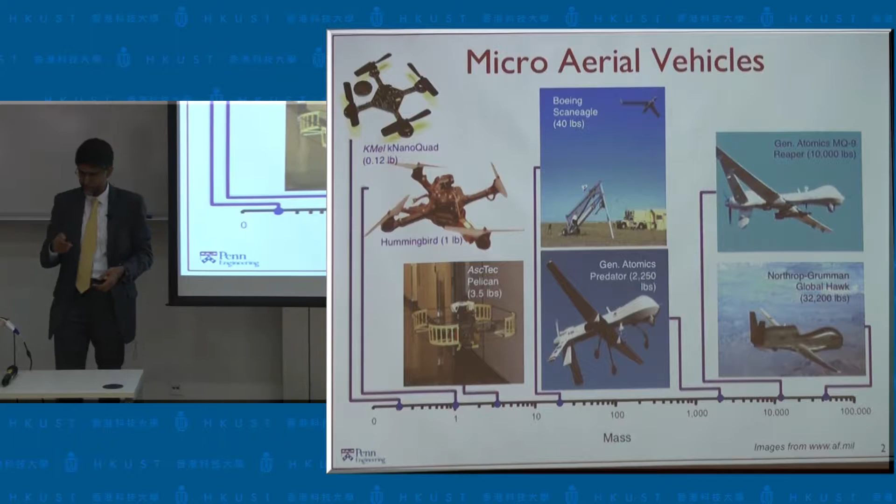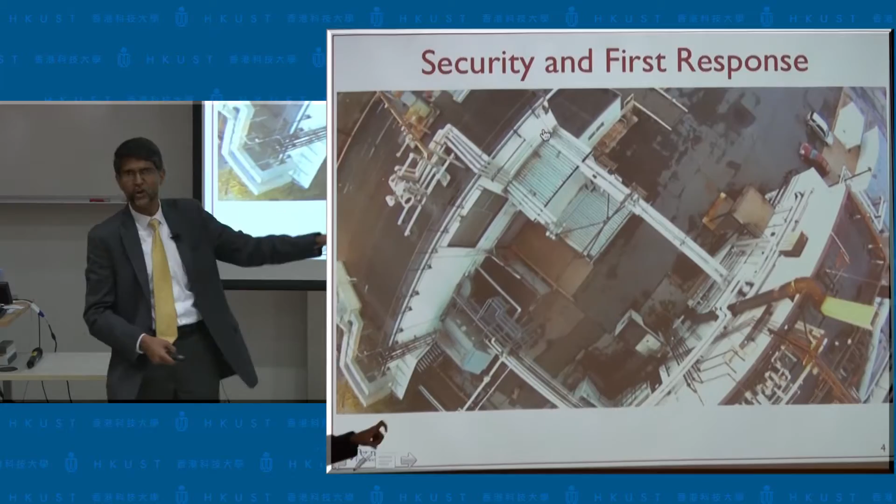We also want to use them for applications in security and first response. Here you see a simple application of one of our robots flying about 80 feet off the ground, able to track objects on the ground. Something like this you can program to be autonomous and perform surveillance, looking out for suspicious objects, tracking cars or moving vehicles, and so on.

Ideally, we'd also like to be able to do things like this. This is not sped up—this is just a robot flying through buildings. There's some manual interaction here, and some of this is autonomous. But what we'd like to do is have them go through buildings, go in and find out what's there, and tell us if there's something unexpected, so that if human first responders need to go in, robots can provide an integrated view of what's inside the building before they actually go in.

So I'll be telling you a little bit about how we enable autonomous flight for operations like this, for example, flying through hallways.

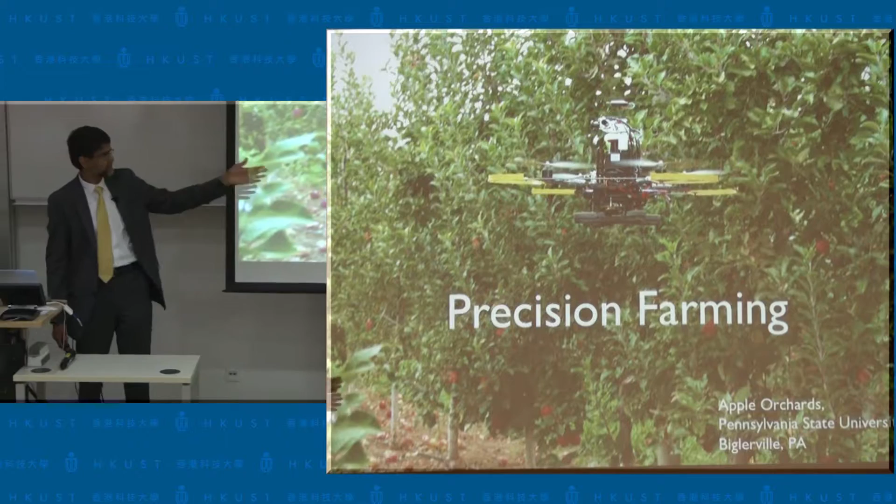And then lastly, we're interested in applications in farming. These are experiments we conducted not too long ago at the Penn State campus, which is distinct from University of Pennsylvania, in Biglerville, Pennsylvania. These are apple orchards. What we'd really like to do is fly through the tree lines, fly above the tree lines, map out individual trees, estimate the canopy size, project the growth rate, count the number of apples on trees, and distinguish between them.

No, this is a serious problem, by the way. Think about a manufacturing plant—you ask the plant foreman how many widgets you have of type X or type Y, and there's an answer. You ask a farmer how many fruits they have, and there's no estimate. So we'd like to be able to do this and, plant by plant, document what's growing, how fast it's growing, and also monitor the state of plants.

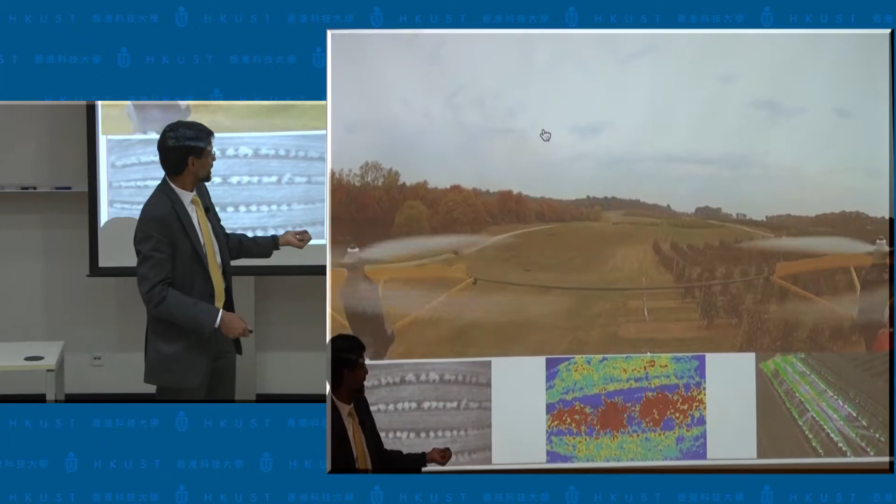Using some very simple techniques, we think we can detect, for example, which plants are suffering from heat stress and which are suffering from water stress. Here are examples of three-dimensional maps that we can create on the fly. In this particular case, we have three robots simultaneously accomplishing this operation.

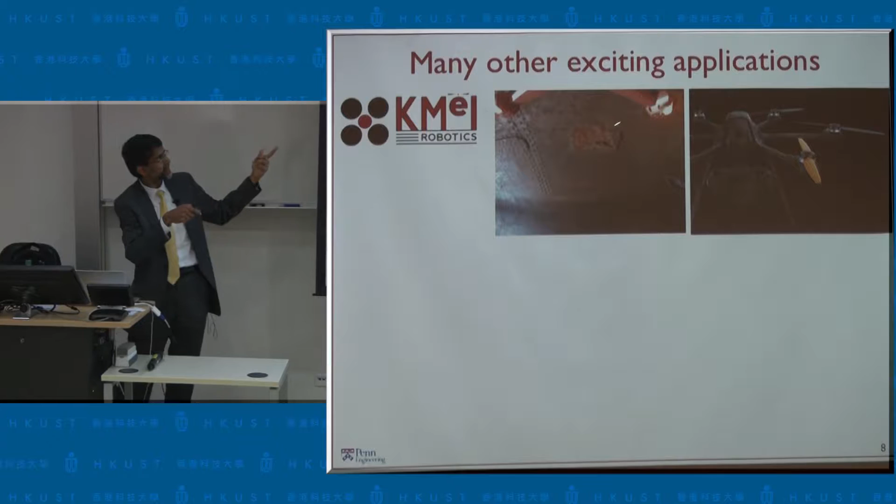And there are many other exciting applications. One of our spin-off companies, KMel Robotics, has partnered with a company in China to create these flying eyes for aerial photography. A more interesting application, however, is a robot for inspecting the inside of hydroelectric power dams.

This is actually the interior of a penstock, which feeds water from a dam through the turbines downstream—going inside and inspecting the interior to detect rust spots like this. So we'd like to be able to do this autonomously.

Another company is looking at developing a swarm of quadrotors with small ground-penetrating radars. The idea is that military convoys typically can only go at 2 to 3 miles an hour because somebody has to go in front and sweep the area for explosives. But if you have ground-penetrating radar in a swarm that's patrolling, you can potentially increase the speed by an order of magnitude. So we'd like to be able to do things like this.

And then finally, a company in California is interested in monitoring construction sites. This is a football stadium—for those who know American football, this is the new 49er stadium in Santa Clara. So we'd like to solve problems like this, which involve monitoring and logistics.

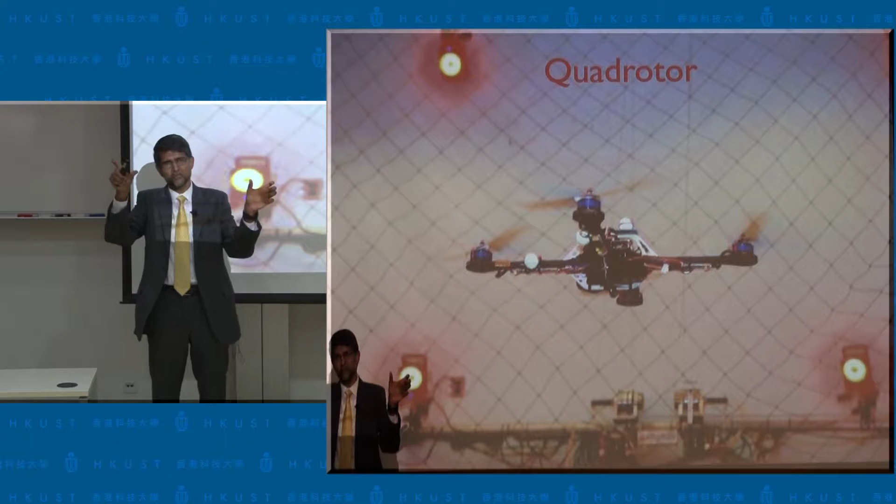And again, the vehicle of choice for us is a quadrotor. If you want to build large teams of robots, you want to pick a design that's mechanically simple. Although there are lots of ways to build microaerial vehicles, today the easiest thing to build is a quadrotor—you have a rigid frame, motor, props. As the rotors turn, you generate large gyroscopic moments, all transmitted through the motor shaft to this rigid frame. There's no flapping of the blades or anything like that—it's just a very robust design.

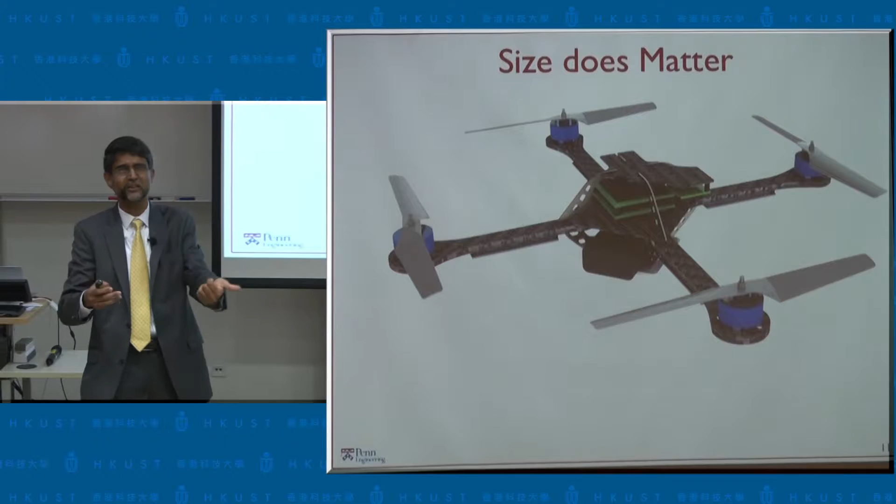As in many things, size does matter, and you can look at scaling effects - basic laws of physics, inertia, aerodynamic forces. If you take the characteristic length R and squeeze it, you'll find things like mass and inertia go down dramatically. Actually, so does thrust.

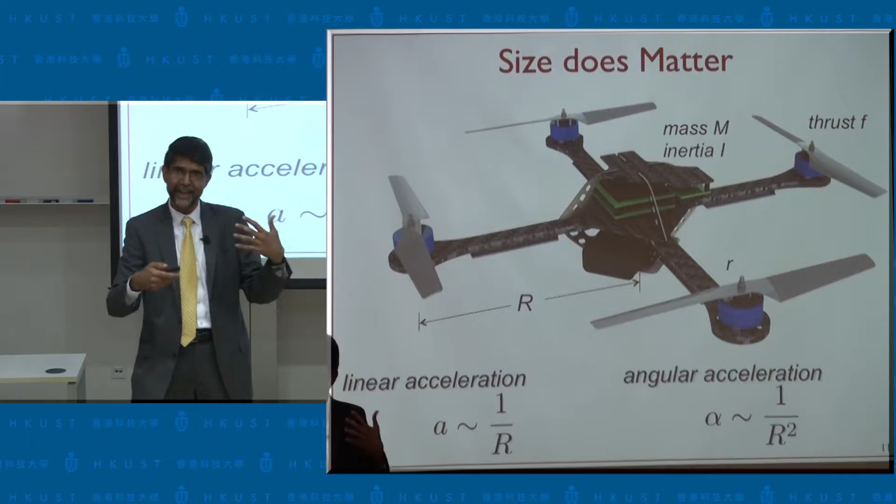But if you look at the scaling of aerodynamic forces and rigid body dynamics, you'll find the maximum acceleration you can develop goes inversely as R. So if you take your typical platform and scale it down by a factor of 2, the acceleration doubles. More importantly, the angular acceleration goes up by a factor of 4.

So we like to use this to create really small robots that can maneuver very quickly. Our smallest robot, shown here, can perform flips in about half a second, meaning it needs to accelerate from 0 degrees per second to a top speed of about 2,000 degrees per second in roughly a quarter second.

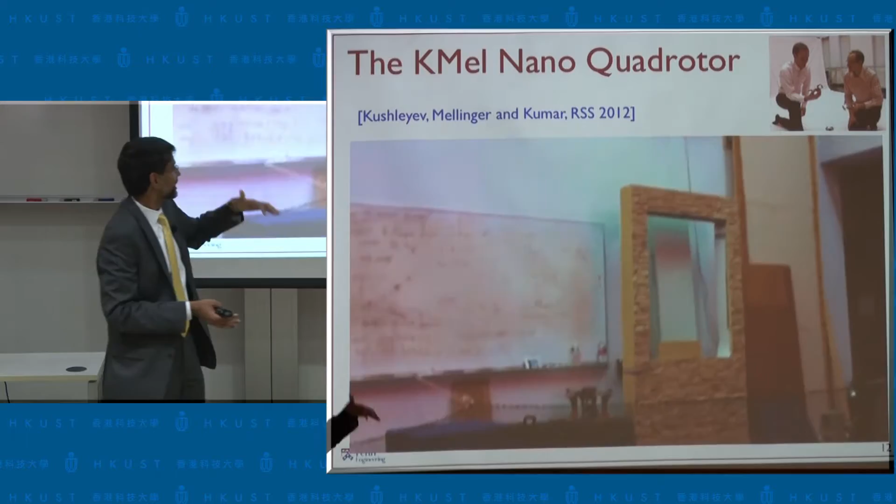We work very hard on building controllers that can stabilize these rotations, and I'll say more about this going forward. By the way, this is the work of Daniel Mellinger and Alex Kushleyev, who are principals of KMel Robotics, the spin-off company I told you about earlier.

So what I'd like to do in the next 40 minutes or so is tell you about some of the research problems we're trying to tackle. First, problems in dynamics, control, and planning of quadrotors, particularly focusing on agility and autonomy.

Second, a fundamental problem that has to do with state estimation. If robots are to be autonomous, they have to figure out where they are in this world without relying on external sensors like the motion capture cameras I showed you earlier, or GPS. You cannot take GPS for granted, particularly indoors.

And then lastly, I'll talk a little bit about how we think about swarms of these cooperating to do different tasks. So those are the three areas I thought I'd hit on. If there are questions, I'll stop briefly at the end of each area and take your questions before moving on.

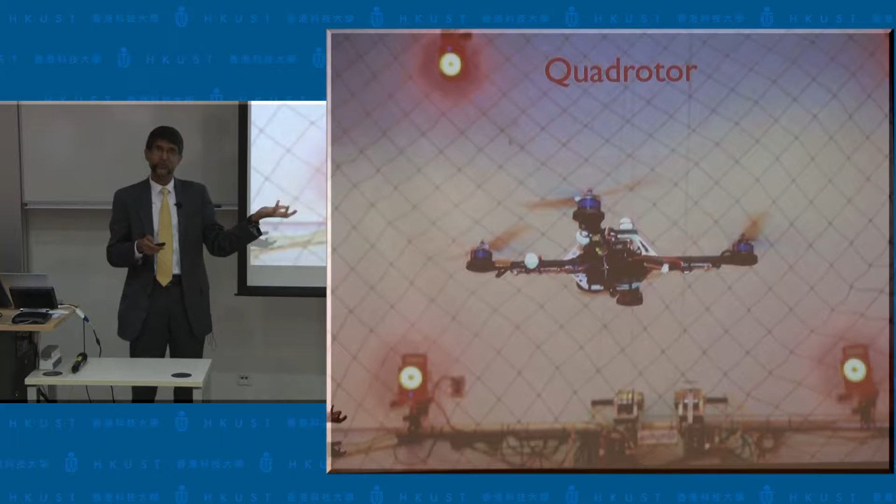Okay, so let's first start by talking about the dynamics. A quadrotor consists of - and I'm going to assume most of you are not familiar with this, so this is a basic introduction to how things work - a quadrotor, as I told you before, is an aerial robot with 4 rotors. The most important thing you need to know is how to control the roll and pitch.

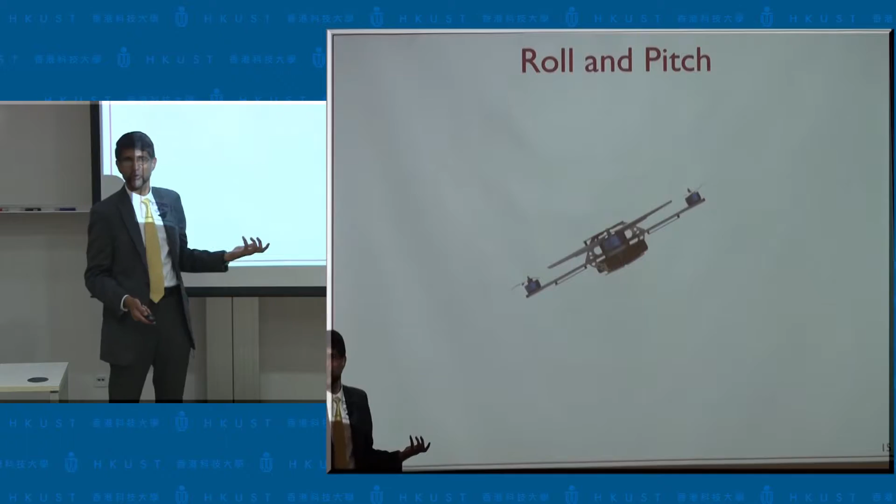At equilibrium, all the rotors spin at equal speeds, and the thrust compensates the weight. If you wanted to roll or pitch, you take one rotor and spin it faster, generating more thrust than the other, resulting in a pitching motion - or you can think of it as rolling out of the plane. If you want to go in the other direction, you just reverse the differences in the rotations. We work quite hard on designing controllers that can stabilize roll and pitch through 360 degrees.

And what you see here is some sense of how robust the controller here is. You see Daniel Mellinger just throwing the robot into the air, and we need to have it stabilize automatically. One of the things you can actually show is that this is a controller that works on the group

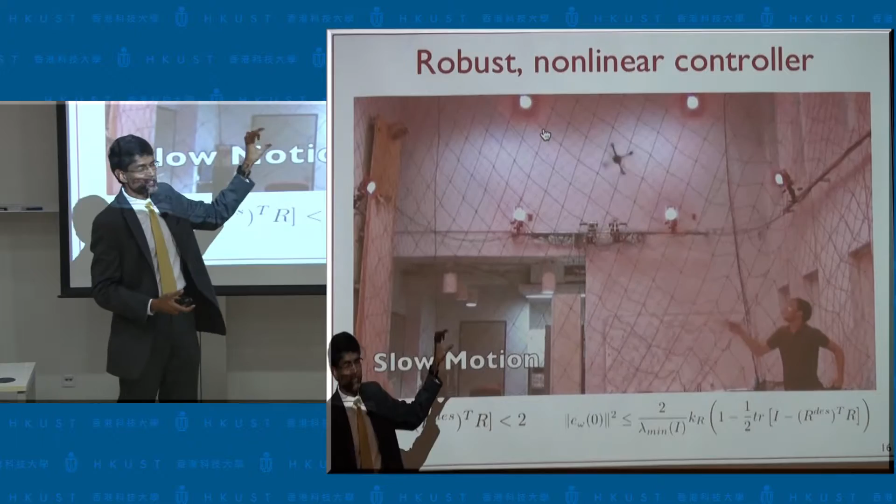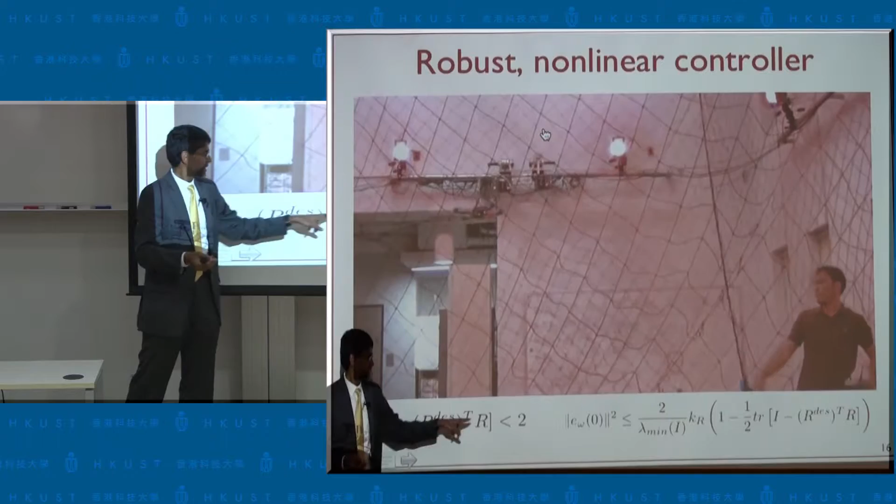of rotations, and it's stable almost everywhere. The basin of attraction is almost everywhere. In fact, if you look at this inequality, this basically tells you that the rotation matrix can be far away from the desired rotation matrix. This is an equality when the rotation is exactly opposite. So in other words, I want to get to this configuration, but I'm starting off in that configuration. So that's the only point where it fails.

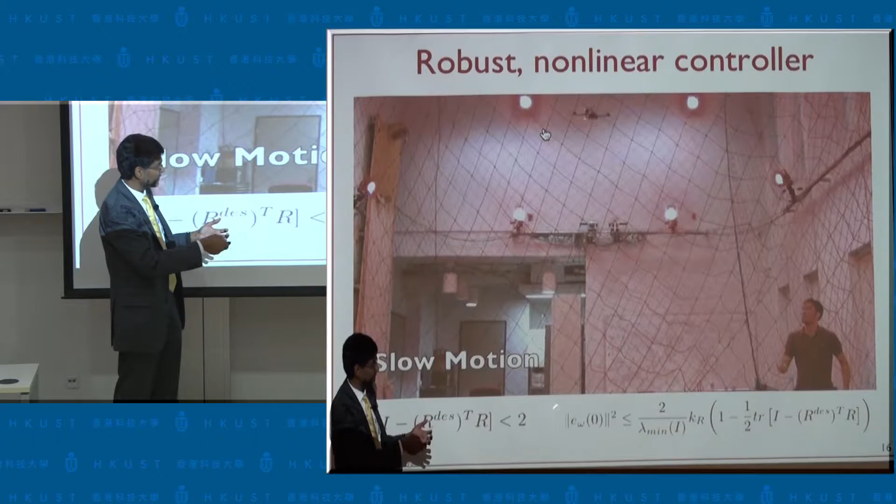This equation basically tells you that if you look at the allowable errors in angular velocity, that's bounded by this right-hand side. And a key thing I want to point out is if you look at the denominator here, this is the smallest eigenvalue of the inertia tensor. So what this is telling you is if I can make the robot really small, this inertia tensor is small, and therefore the denominator is small, and the right-hand side grows bigger. And that tells you that the allowable errors in angular velocity can be larger. So again, this idea that as you make things smaller, your controllers actually become better and better, and you can leverage that as you see in this particular picture.

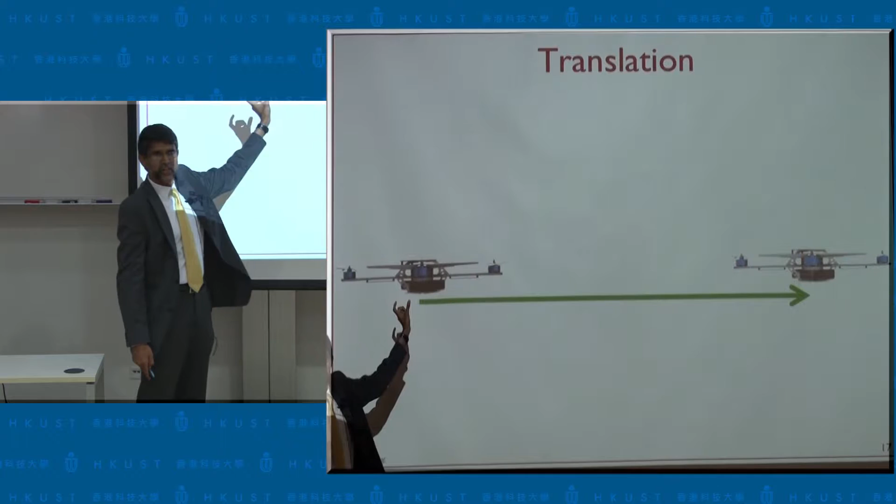Translation, however, is a little more complicated. So if I want to take this robot and have it translate from one position to another position, this is hard to do because, remember, the thrust is actually in the vertical direction. So the only way you can get it to go horizontally is by pitching it forward, redirecting the thrust. And then when you're going at maximum speed, you have to start slowing down as you get to the final position, which means you have to pitch backwards and reverse the thrust. So mechanical simplicity means that you have to spend quite a bit of effort in the control. And then when you get to the end position, you have to pitch it back to the position you want to be in. So all of this needs to happen seamlessly without the user sort of worrying about the controls.

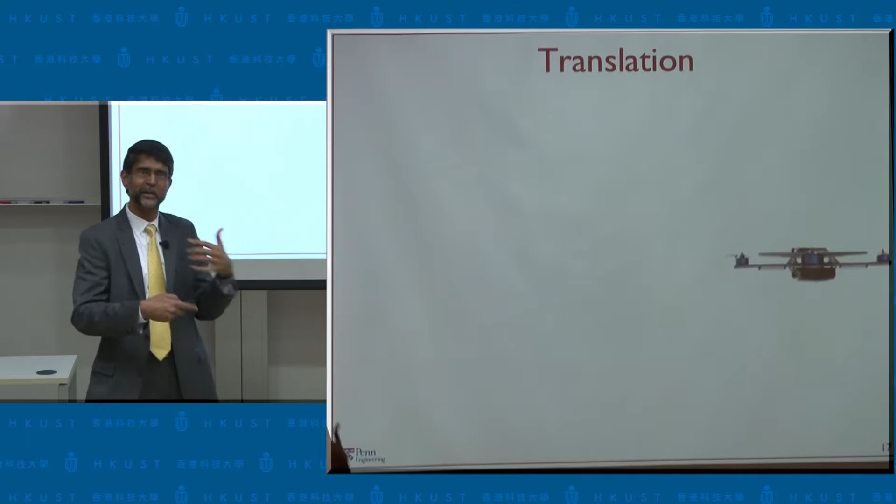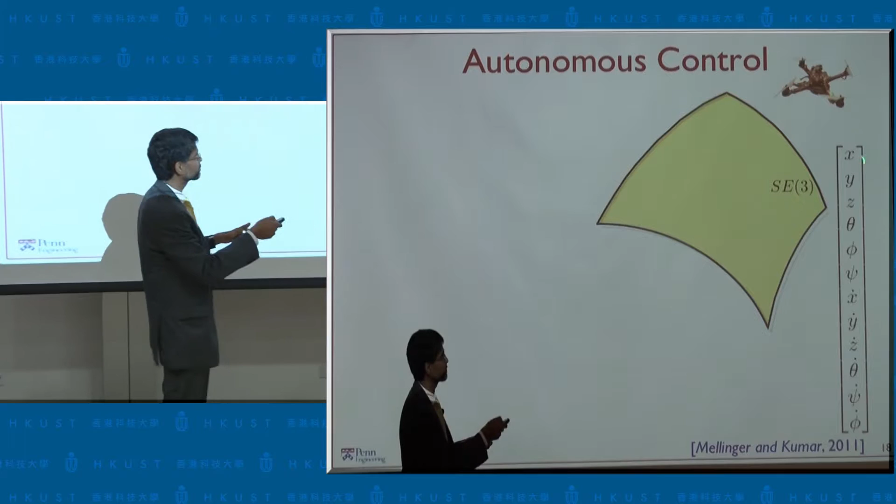And remember that when you put all of these things together, you can't ignore or decouple the position and orientations. They're all coupled. And plus, you also have to consider the velocities. In fact, if you look at the state space, and if you look at the global nature of the state space, it's best described as a tangent bundle in a Lie group type setting, and the Lie group in question is the Euclidean group.

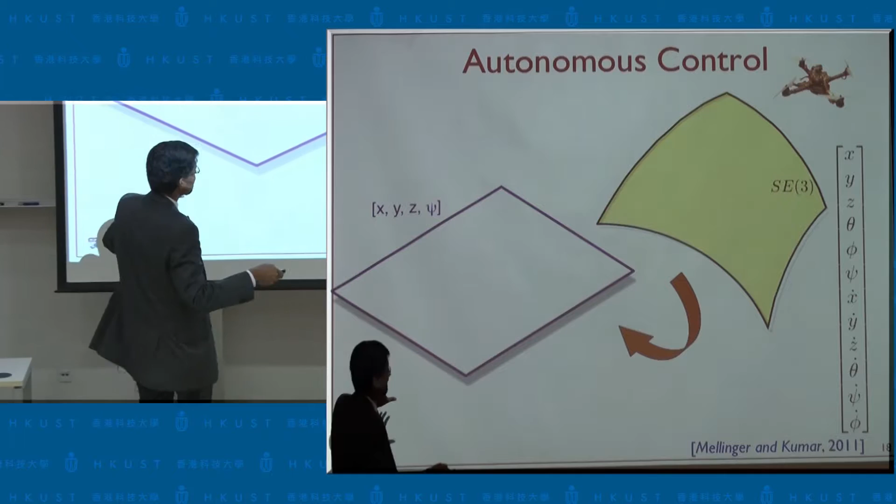So you really have to figure out the dynamics on this group and design controllers and trajectories on that group. So fortunately, there's a differential structure that actually simplifies the treatment of the mathematics of this problem. It turns out that there's a map between this space and a space that's almost flat, such that all realistic trajectories, all trajectories that satisfy the laws of physics, actually map to sufficiently smooth trajectories in this almost flat space. So this almost flat space consists of x, y, and z, which is actually flat. This is the Euclidean space we live in. But there's another angle here, which is the yaw angle.

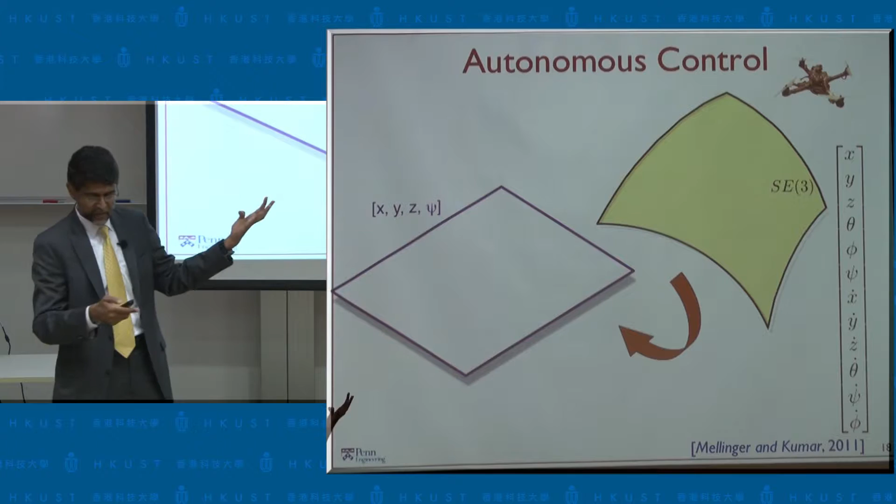So this yaw angle is not truly flat, because the yaw angle has the topology of a circle, so if I were to chop the circle and stretch it out, then it becomes flat. So if you allow me to do that, then the point I'm trying to make here is that any realistic trajectory I can generate here corresponds to a trajectory that lives in this flat space and is sufficiently smooth. In fact, the property I want to insist on is that it's 4 times differentiable. So this property is called differential flatness.

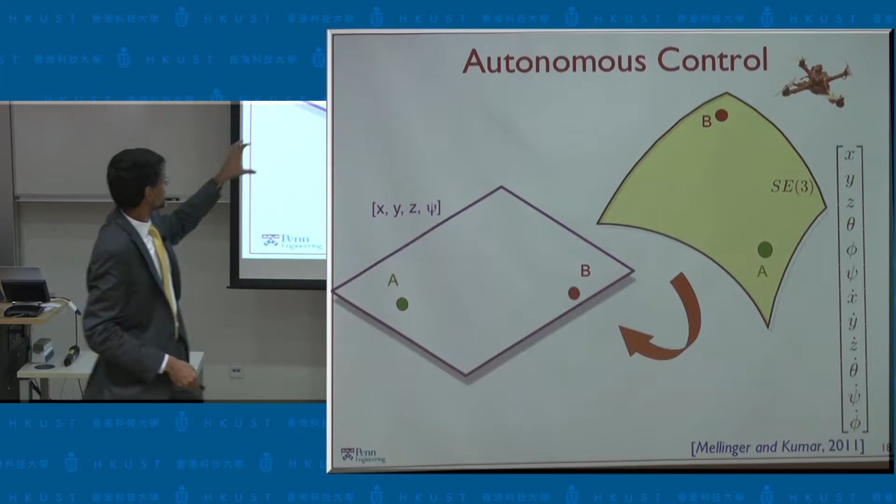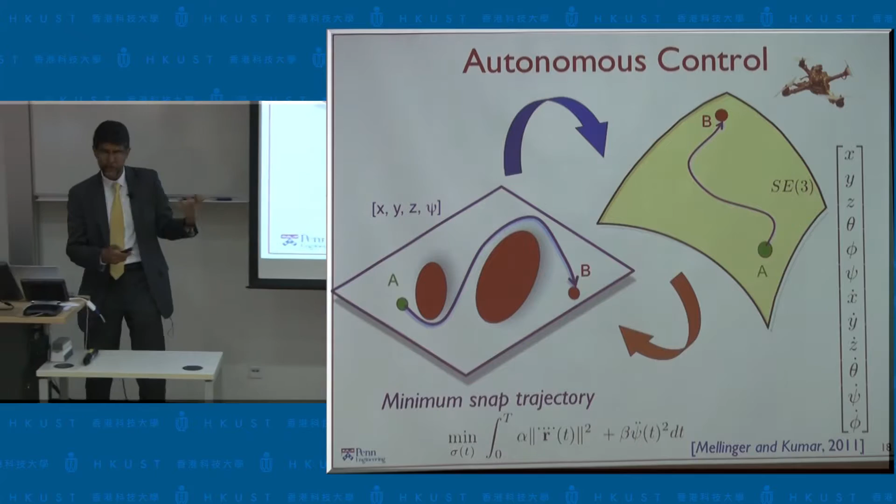So that's the general setup, and I can show you a few videos that illustrate how the robot flies using this trajectory planner. Here's the robot going from point A to point B through an intermediate point C. Although the trajectory it plans is flat, when you convert it into SE3 and the tangent bundle, you'll see large roll and pitch angles that you would not have gotten in the flat space. But the planner is agnostic to all of that. All it's saying is: go from A to B through point C, starting from zero velocity and ending at B with zero velocity.

Everything else happens seamlessly under the hood. This optimization problem we can solve several tens of times a second if necessary to generate trajectories and keep updating them depending on how the environment changes.

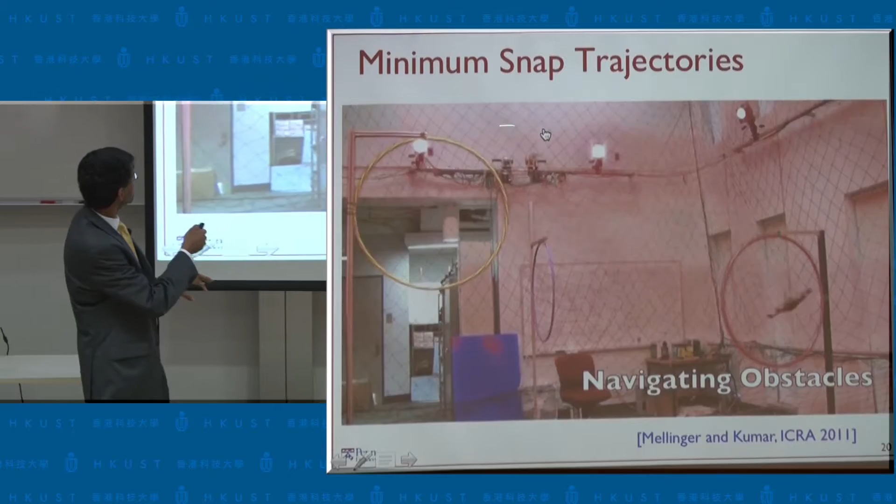This simple strategy we can also use to go around obstacles or through them, as in this case, where you see the robot flying through hoops. Remember, everything in the environment is known precisely — we have motion capture cameras telling the robot where it is and where obstacles are 100 times a second. In fact, when one of these hoops is thrown into the air, the robot knows where it is and how it's falling, extrapolating from the laws of physics to predict its trajectory and plan through it.

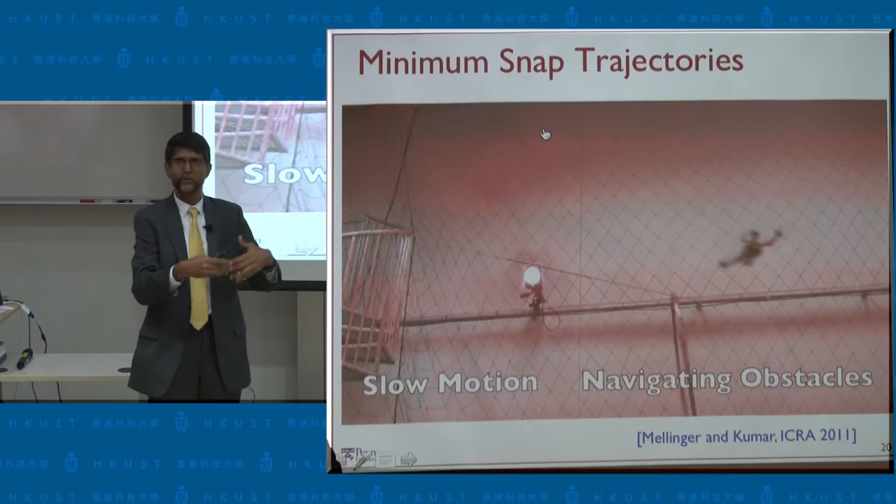We have an orientation controller that tracks the required orientation you plan, and then an outer loop, a position controller, which essentially does the rest. All of this happens on board the robot. The planner itself resides off board, on a bigger computer, and communicates wirelessly to the onboard controller that sits on top of the robot.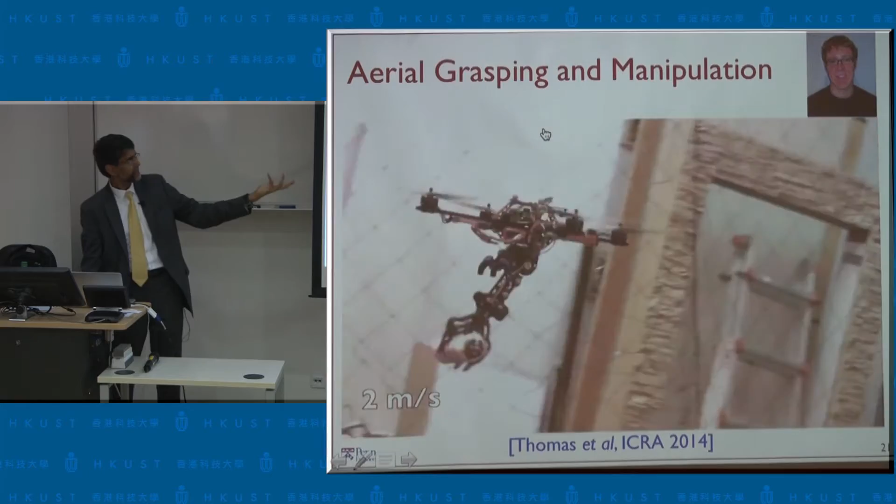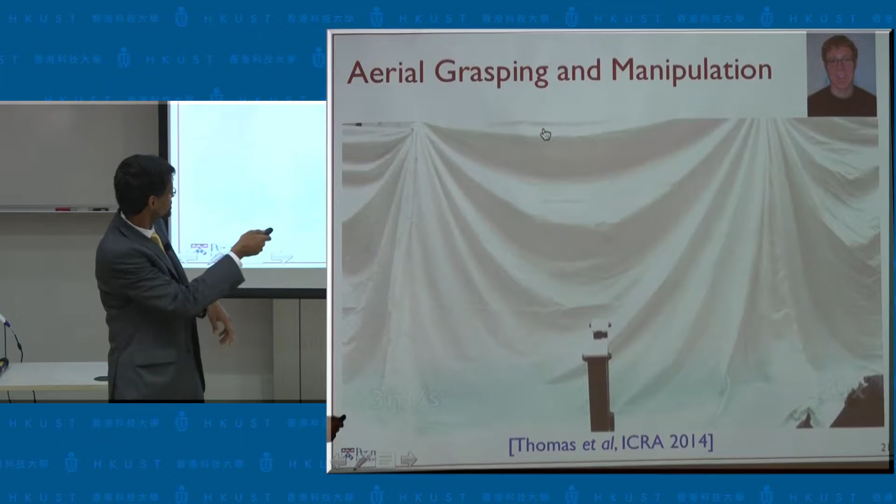It turns out that this particular dynamical system also has the property of differential flatness, and the same theory as before allows us to do exactly what you see in this video. This is work by Justin Thomas, who in three months will be presenting it here in Hong Kong at the ICRA conference.

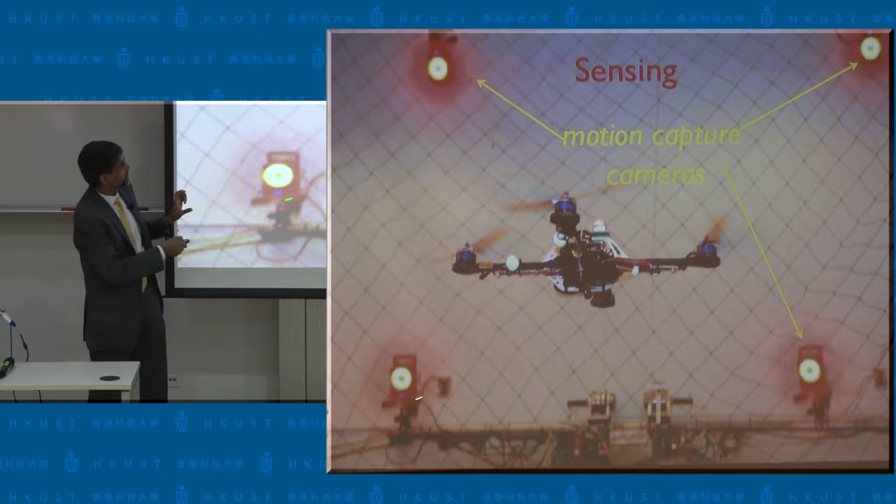However, everything I've told you about really relies on these motion capture cameras. You can see them on top, and the robot is equipped with reflective markers. This is what allows the system to know exactly where the robot is at 100 times a second, with errors on the order of millimeters.

The reality is, we don't have that system available everywhere. Unlike bigger aircraft, we don't even have access to GPS, and even if we did, in the shadows of buildings you won't get GPS. Indoors, where the kinds of missions we want to do operate, there's no GPS, and maneuvering becomes a problem, especially at high speeds. So what I want to talk about next is how we address this problem of estimating state in indoor environments, and how that leads us to autonomy.

But let me pause here and see if you have any questions on the first part before I move forward. Yeah.

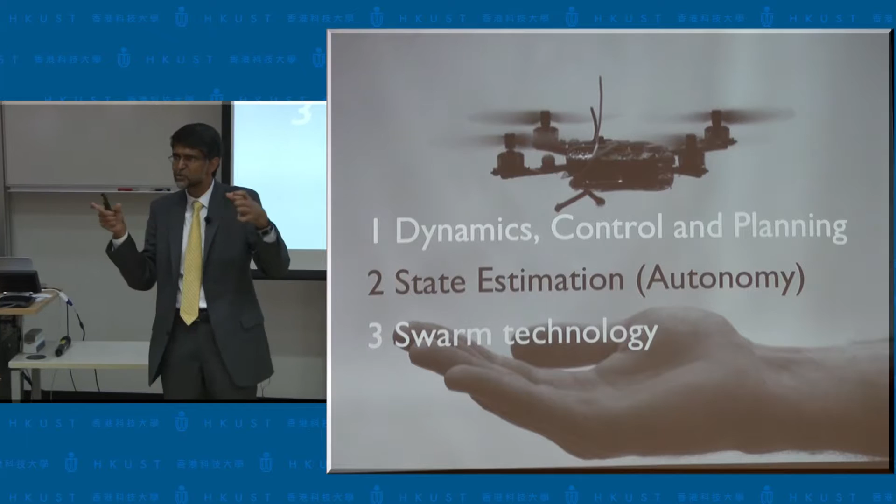So you need four rotors in order to stabilize all the motions — you can show that fewer than four results in undesirable properties. You can certainly do five, six, and so on; in fact, adding more gives you more robustness, and you can make the blade sizes smaller, which is attractive since those blades can be pretty vicious — I actually have my finger taped up from one. So there are benefits to more rotors, but compared to the disadvantages — more motor drivers, more motors — it's just not worth the trouble.

Any other questions? Yeah. You design the trajectory from A to B, you might have a lot of multiple choice.

We're always looking to optimize, so this problem turns out to be convex. If you take this quadratic functional, which depends on the higher order derivatives of position and the yaw angle, that turns out to be convex, and you can solve for it and get a unique solution. But if you have a non-convex problem, I'll talk a little about that.

If you have obstacles and you want to stay outside the obstacles, that is inherently a non-convex problem. But we have ways of convexifying all of that, and the main thing is we cannot afford to have algorithms that hang in the middle of the optimization. So we try to get predictable performance, and that's one of the key things.

Are you really looking for a feasible solution, or are you looking for optimal? If you want to go quickly, you want the optimal trajectory. This trajectory has time scaling properties that allow you to scale down and meet whatever other constraints you have.

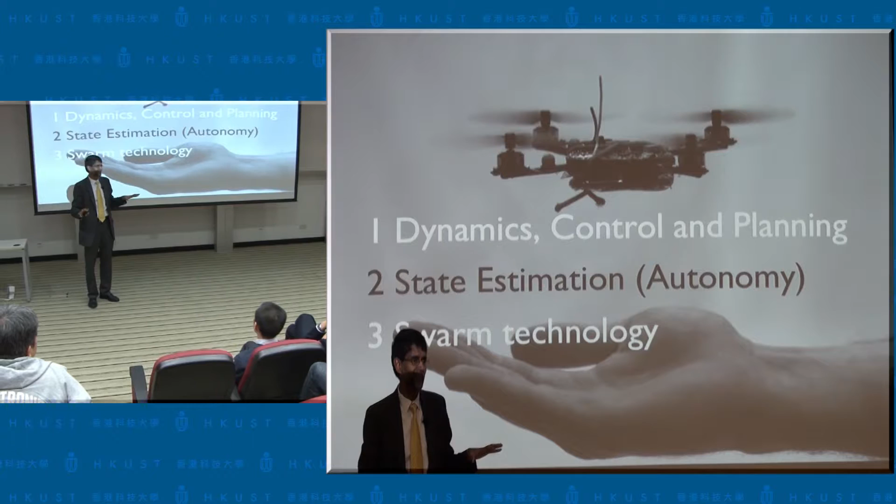Oh, there are a lot of variants in this design. Like I said, I'm a mechanical engineer, so this is the simplest design you can kind of come up with, and it's the one that has served us the best. We've built all kinds of devices, and this has sort of stood the test of time, if you will. Works nice.

Well, so I mentioned the effect of scale on the properties of the algorithm. Clearly, when you try to design the controller, you want to take advantage of scale - the smaller it is, the more aggressive you can make it. To that extent, yes. So there's a model-based part, which obviously depends on the model, and then there's a part that's invariant to the specifics of the model.

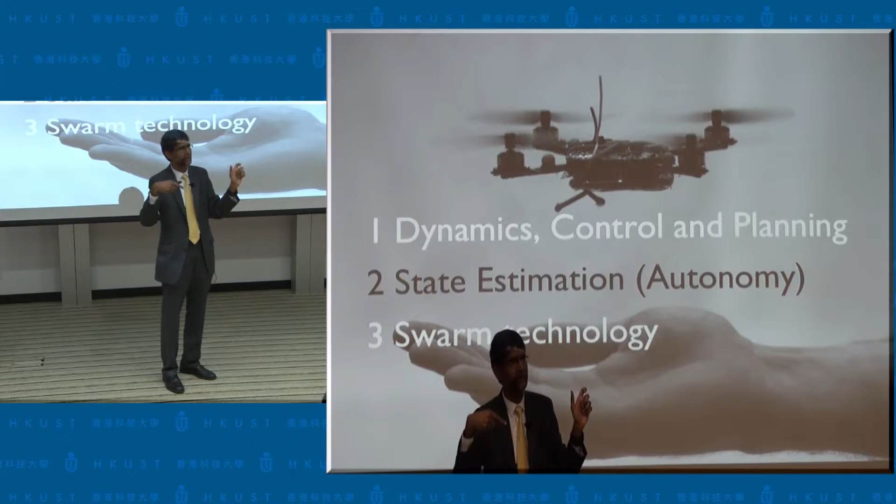I should also say there's a third part which essentially adapts to things it doesn't know about. Like, going through the hoops I showed you, we can actually make the hoops tighter - we can have vertical slots just about the same width as the height of the robot, and have the robot go sideways. But if you do things like that, you have to really adapt to the aerodynamics, so you need some iterative learning scheme that finds out what the right parameters are. That part I didn't talk about. But there are these three parts to it, and all of those depend in one way on the specific type of robot you're using. But the design methodology is the same.

Okay, so let me move ahead.

Talking about unstructured environments again - remember, no GPS, no motion cameras. This was our first attempt to build a robot like this, about 3 years ago. Again, off-the-shelf sensors. The main sensor here is this laser scanner made by a Japanese company, Hokuyo, which has a 270-degree field of view and can see about 20 to 30 meters out. And then this you can get with any Xbox - it's a Microsoft Kinect, essentially an RGB depth camera with a cone angle of about 40 degrees that can see maybe 3 to 5 meters out. So this gives you a three-dimensional picture of what's in the environment, and that's one way you can map features in the environment to figure out where you are.

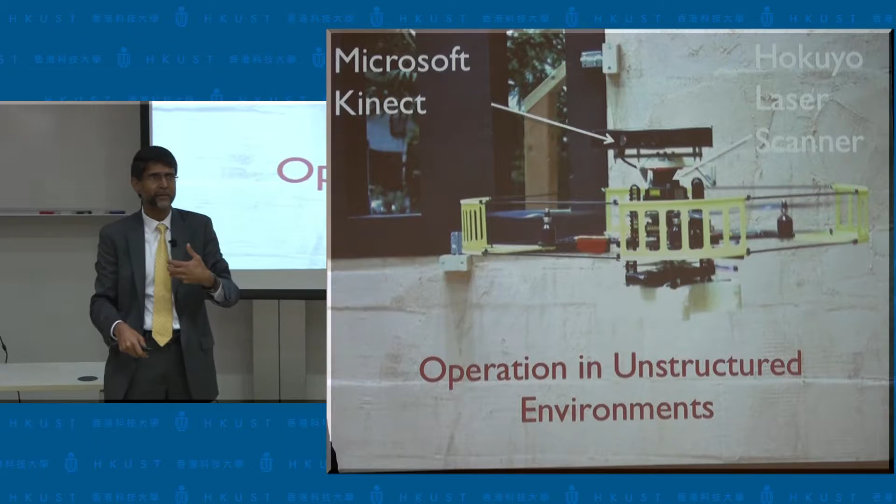For those of you who might not be familiar with this idea, I have a little cartoon that illustrates the problem we're trying to solve. Imagine you have a robot, and an environment with 3 pillars. The robot doesn't know there are 3 pillars in the environment, and even if it knew, it wouldn't know where they are, and it doesn't know where it is in the environment. But imagine it's got this laser scanner that allows it to determine the distance between the robot and the pillar, measuring these distances D1, D2, and D3.

Now imagine it takes a step, and it has an onboard inertial measurement unit that allows it to integrate the acceleration twice to get an estimate of how far it's moved to the new position. At the new position, it gets again, using the laser range finder, three different estimates of range, D1 prime, D2 prime, D3 prime. So the question is, can you, with the knowledge of these parameters, so there are 6 of these measurements and then 2 estimates of delta x, figure out what the real translation is and where these pillars are relative to the robot?

If you write down a few equations, you could quickly convince yourself that this is actually doable. You essentially have 8 unknowns: 6 unknowns have to do with the pillar locations, and 2 unknowns have to do with the robot displacement. You can determine what these quantities are by solving these equations. You have enough equations. This problem is essentially called simultaneous localization and mapping. You've not only figured out where the robot is, but also figured out where the pillars are.

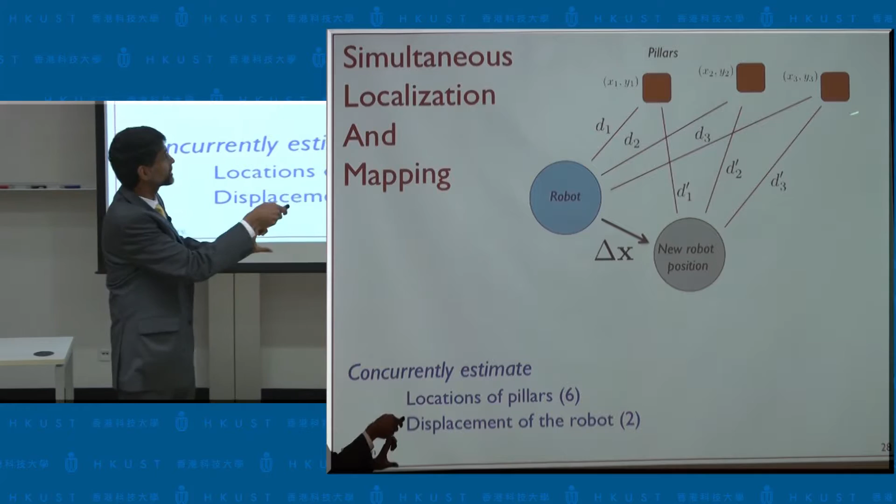In the robotics community, we call it SLAM. This is sort of a key component technology, and we have to actually do this in real time. In the absence of motion capture cameras, you want to use SLAM algorithms to determine how far the robot has moved, and you want to do it 100 times a second to run the same control loops. And it has to be done on board. So if you want a truly autonomous robot, you can't really outsource some of the computing to an off-board computer.

So our first attempt to do this relied, again, mostly on the IMU and the laser scanner, and to a lesser extent on the camera. And the key part of this is really looking at the laser and the IMU and getting some estimate of how far you've moved, this pose estimator that I told you about.

The only difference now is that not only do I have to figure out how much I've translated in X and Y, I also have to figure out how much I've moved vertically and how much I've rotated. So all of that stuff is happening here. In fact, this takes up about 20% of our CPU, which is a 1.6 gigahertz Atom processor, a netbook-style processor.

This is quite key. Once you can do that, you can start building a map, and this is sort of called an incremental SLAM map, which essentially builds an occupancy grid representation. So imagine every feature that I build, as I see in the environment, I put a box around it, and I create this world of boxes. That's happening over here, and that allows the robot to localize itself as it moves forward off those boxes.

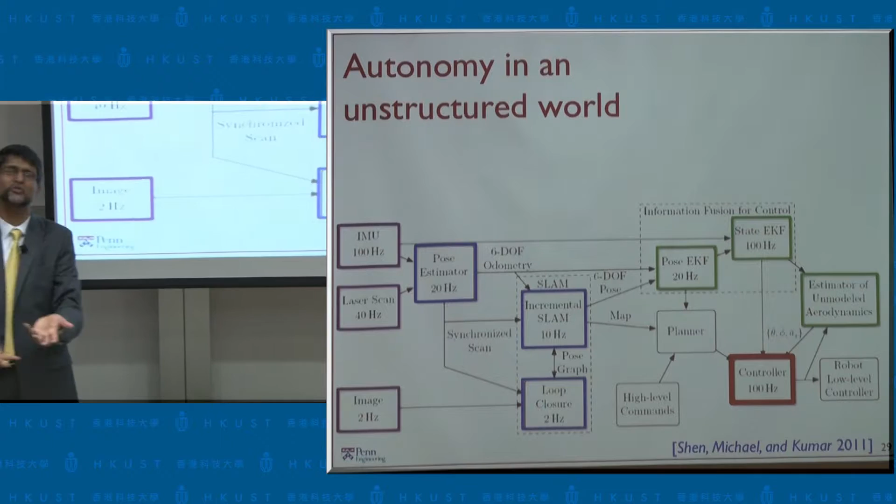One thing you don't realize is if a robot is actually traveling, let's say, with a column of air below, and then it moves over onto another surface where the column of air is smaller, the lift that you get actually increases. This is called a ground effect, which is well known in aerodynamics, and you want to estimate that as you fly. We also have something called the ceiling effect, which most people in aerodynamics don't think about because helicopters don't fly close to ceilings, but we do. The ceiling effect is actually the opposite: in the ground effect, you get push off from the ground, and in the ceiling effect, you actually get sucked into the ceiling, which we found out the hard way.

But the robot needs to adapt to that. So all of this stuff is happening on board 100 times a second, and that's key to making this thing work efficiently. This is the work of Shaojie Shen, who's actually here today, as it turns out, and Nathan Michael. And you can see the system, the early system that we built.

The robot takes off outside this building. It's never been inside this building. This is what it sees. The laser scans that it gets are being translated to the map.

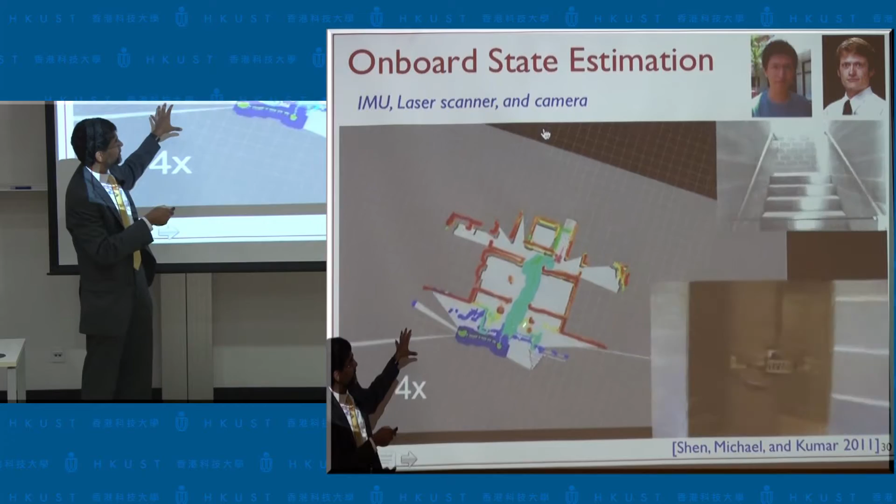Shaojie is sitting outside on his laptop, and he sees this map, and he's able to command the robot by clicking on points on the screen. He clicks on this point, the robot plans a trajectory, and you'll see he clicks again, and there's a red snaking trajectory over there that the robot plans.

As it moves, it gets more and more information, getting a better map, and that goes back to the human operator, allowing the human operator to command the robot better to get more information. So this process involves the human interacting with the robot to explore this environment in which he or she has never been before. This is a pretty important tool.

Again, you think about first response, security applications. This is something that you can really use to explore buildings that you don't want to enter in case there's any source of danger for humans.

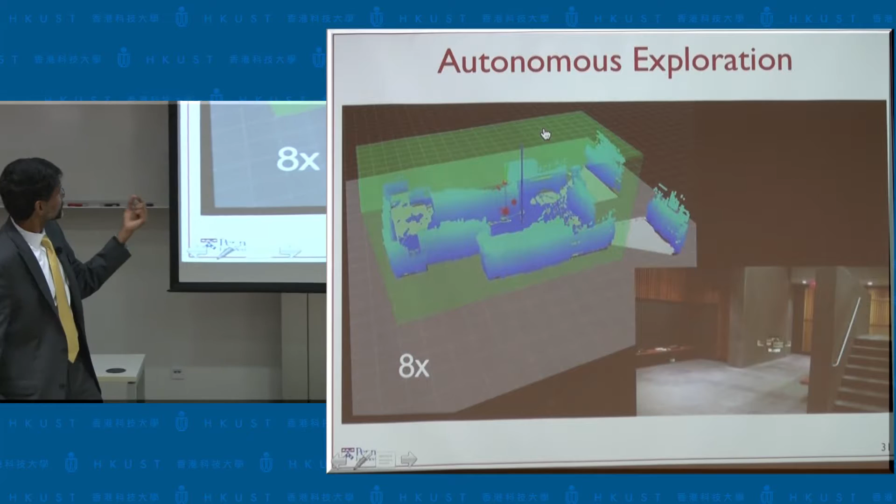You can also get the robot to automatically figure out where to go. This is the idea of autonomous exploration where we have this information theoretic view of maps, and the question is, what steps can the robot take to maximize the amount of information gathered? In this video, sped up 8 times, you'll see the robot in a fairly complex building, creating this map and figuring out what positions to go to in order to collect more information. This map is being built on the fly, and here there's zero human interaction between the operator and the robot - the robot is building this map on its own.

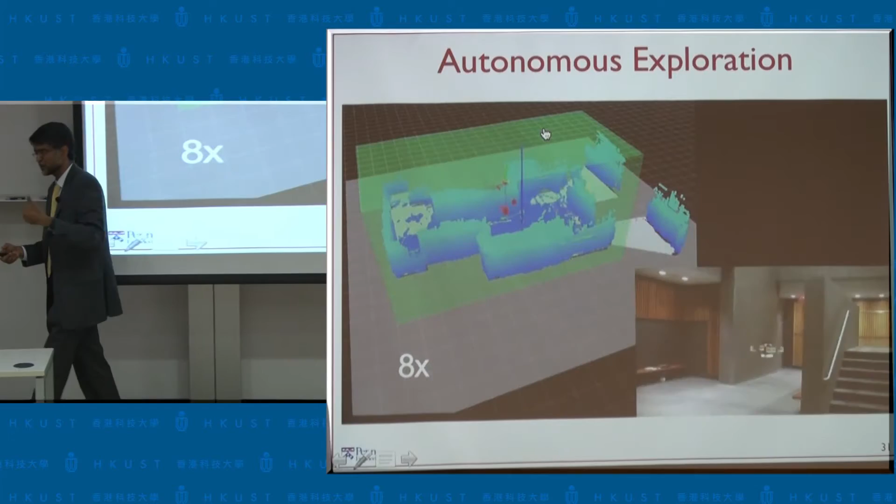So tools like this can be very useful. As you can imagine, if you have, for example, an anti-terrorism operation, or you have an active shooter spotted in a building, and you want to go in and see what's in the building, something like this can really be used to good effect.

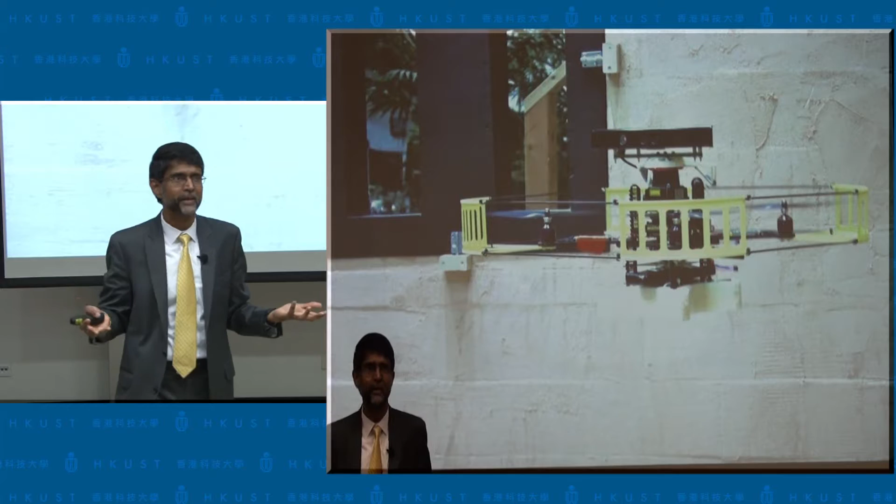The problem with this design, of course, is that it's quite big. It weighs nearly 2 kilos. I started by telling you about these palm-sized robots, and all of a sudden I have something that's quite big. It can still go through doorways, but it weighs about 2 kilos. More importantly, it consumes about 480 to 500 watts of power - that's a lot of power, half a kilowatt, for something that's essentially moving around. It's pretty small, it's not doing a lot of physical work like picking up objects - all it's doing is wandering around and mapping and navigating buildings.

Why is that? Well, we wanted to put all the sensing on board. We started off by saying, let's put a laser rangefinder on board. That added some mass to it, and because of that, we had to make the motors bigger. Once you make the motors bigger, you have to put bigger batteries on it, and once you make the batteries bigger, you have to have bigger props, and that takes you in the wrong direction - it scales up as opposed to scaling down.

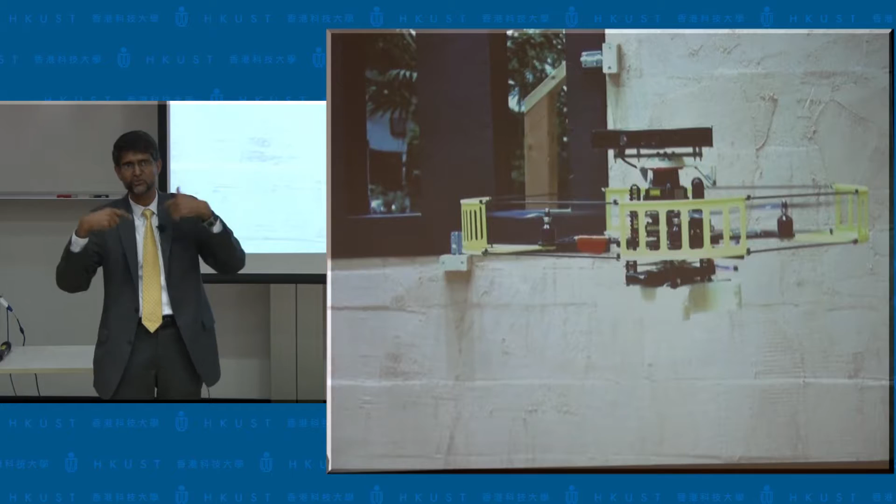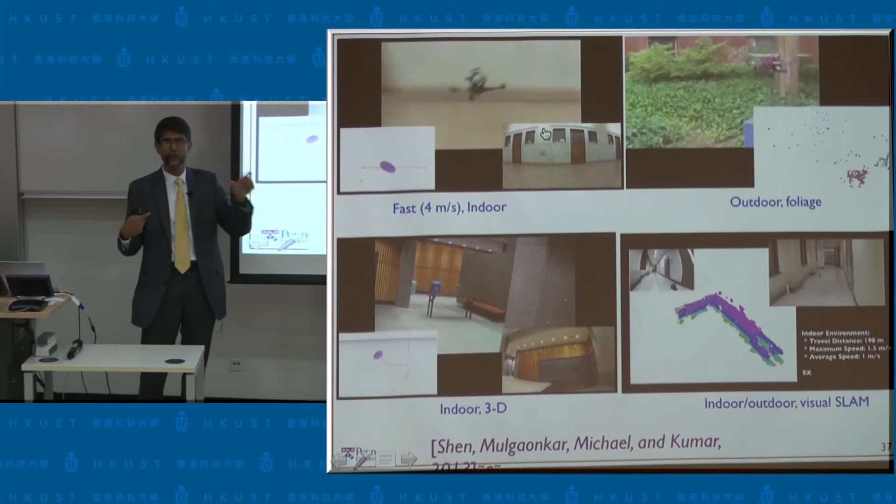I think even more impressive are these video clips. On the top left, you'll see our robot flying 4 meters per second indoors, which is a pretty brisk pace. If you look at your walking pace, it's about 2 meters per second, so this is about twice walking speed.

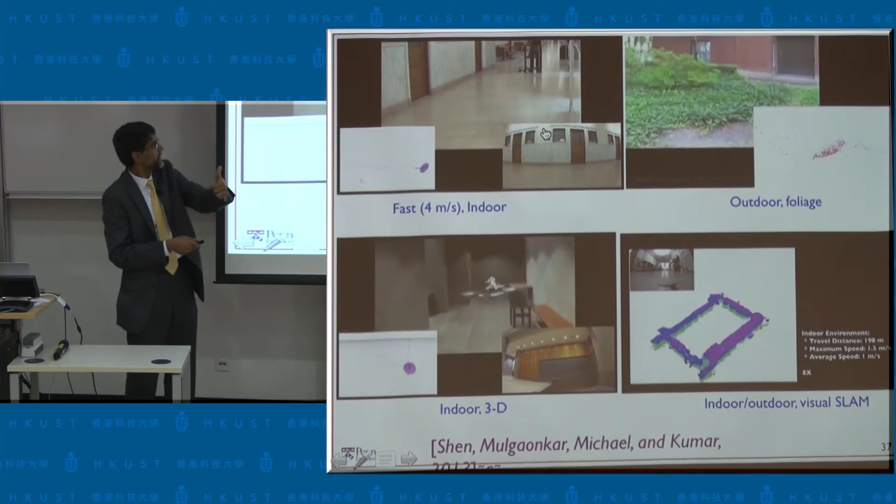This is outdoors. This one is sped up, but the key thing I want you to notice is that in spite of all the downwash from the rotors, you see the foliage moving rapidly, yet the robot can still find enough features to track as it flies. This is in a 3-dimensional environment. This is actually a much longer flight where it's taking all the features it's found and building a grid-type representation, creating a map. This map may not look as nice as the map I showed earlier with the laser, but it's enough for a human operator to actually drive the robot remotely. If you know what this map represents, that's enough for you to command the robot.

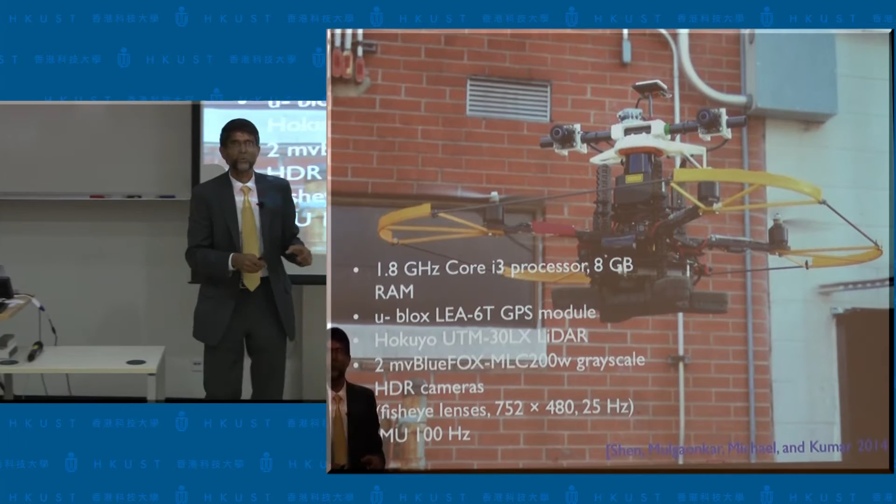And then finally, our most capable system is this one, which has not only the 2 cameras, but also a laser on top and a GPS unit. So the reason we want this is we want to use whatever sensor works.

In this video clip, you'll see this is about a half a kilometer flight. You'll see in wide open areas, the only sensor you can get is really GPS. So here there's only GPS. Here's the covariance ellipsoid that's estimated by the robot. But as it gets closer to the buildings, you can see that it actually, the laser detects these walls.

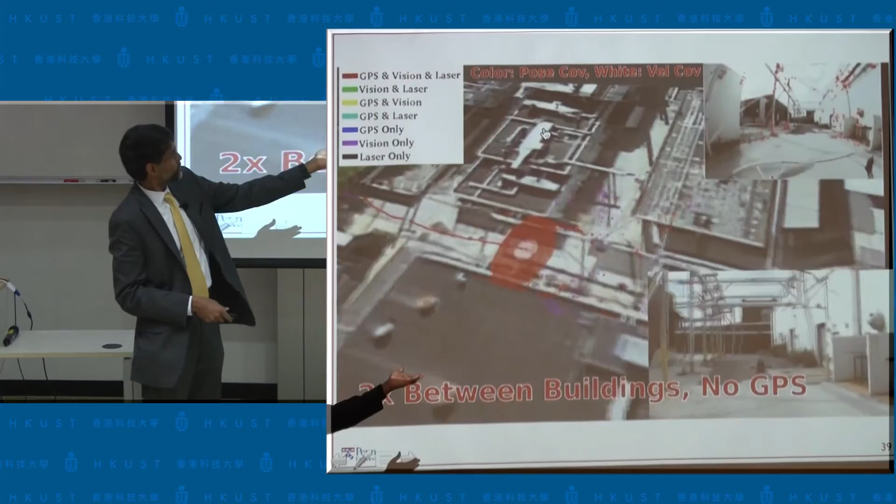And it's able to triangulate using the GPS and the laser. And now you'll see it flying through this clump of trees where, in fact, GPS does not work, but the camera does work. And it's able to use the camera and the laser to localize itself. And when it goes indoors, as you'll see in a minute, again, GPS fails.

So depending on what sensors are available, the robot's able to integrate information, fuse it into a reliable state estimate. And again, this is Shaojie Shen's work. So this is, I think, pretty remarkable in the sense that you have a fairly robust capability. Regardless of the environment, the robot's able to localize and function autonomously.

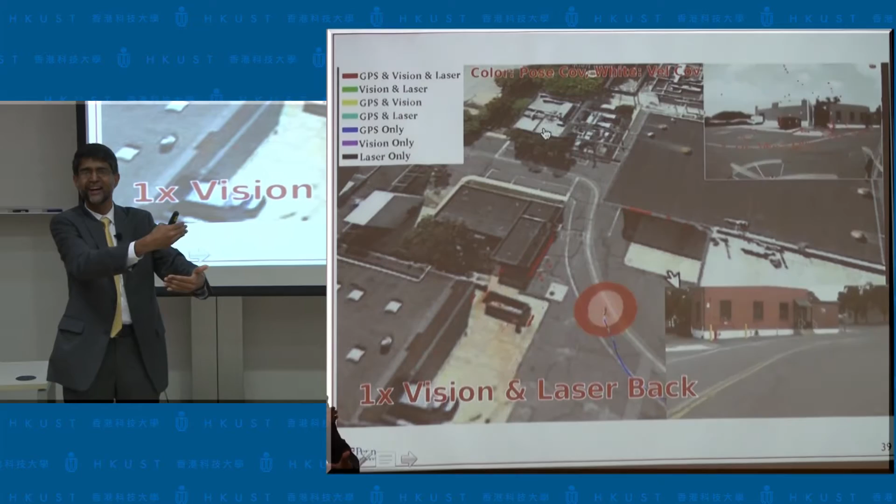So having said that, there are a couple of environmental features that will really throw the robot off. For example, glass. I mean, even birds have, I mean, human beings have a hard time when you walk in, you know, I'm sure you've seen people walking into glass walls. But birds fly routinely into glass walls, and the problem is cameras don't see well on glass walls. The lasers also don't work too well.

That's one problem. The other problem is with smoke and dust. So you need other kinds of sensors. But in most settings, these kinds of sensors do work. And again, the idea is that you want to piece together as many sensory inputs as possible and build a robust filter out of it.

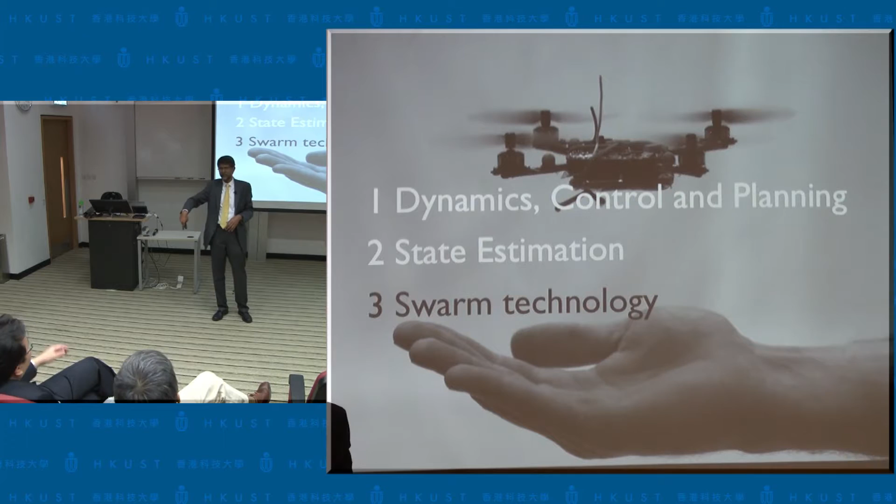So the laser actually has a 270-degree field of view. But if the robot's going forward, you really have no use for the part that's behind you. So what we do is we arrange mirrors that deflect some of the beams behind, pointing up and pointing down. And that allows us to, but if you don't have a laser, the thing you want to do is use a barometer.

So you don't get very good estimates of height, but it's enough for the robot to work. And remember, you also have an IMU on board that gives you some measure of the Z acceleration. Yeah, you can actually map the terrain underneath you if you needed to.

But that's what you really want. So the problem with this laser is it's two-dimensional. So if it's two-dimensional, you just think about it, there's no way you can take off because you don't know what's above you. So you need something above you. So Kinect gives you this 40-degree field of view that allows you to actually look at things on top. So which means when you fly, you can fly in angles that are 40 degrees to the horizontal, at most 40 degrees to the horizontal.

To do the feature-based, so we extract features, estimate the altitude. Well, right. And you also want to make sure there's nothing in front of you. So if you take off this way, you don't know what's on top of you, right? But if you're looking in this field of view, then you can take any trajectory this way because you have complete visibility in front of you.

That's a great question. Technically, you're right. So unless you have a laser, you really cannot. With a Kinect, you can because it's a depth sensor. So with a camera, if you don't find features, that doesn't mean there are no obstacles in front. So there is a finite probability that you're going to fly into something.

That's why we have this cage around us. Oftentimes you bump into things and you know there's something there because you bumped into it. This is like a blind man sort of looking for walls. So that's also important.

So certainly power is a challenge. One question you can ask is, if you're only given 10 minutes, what can you do in the 10 minutes? Rather than say, well, I want to wait till I get the next generation of batteries, or my favorite is small rocket engines, because rocket fuel has the energy density and the power density. The question you can ask is, how can you perform whatever you need to perform in 10 minutes? Most likely it's going to mean move faster, move more quickly, get the information more quickly, and get out. That's what we'd like to work on.

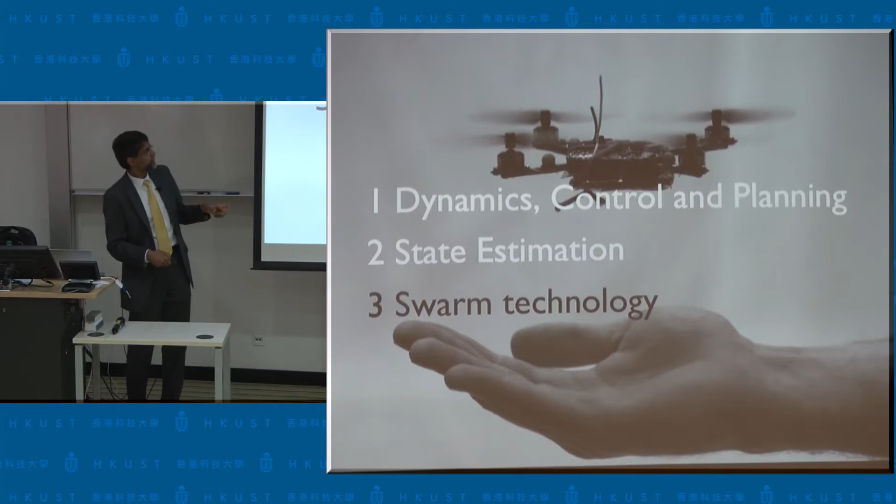Okay, let me talk a little bit about creating lots of these robots and getting them to cooperate in performing tasks. I want to give you some examples of the challenges. I want to show you what it means to have a small team of robots collaborate, and show you the work of Quentin Lindsey, where he figured out how to get 3 robots to collaborate in performing assembly tasks.

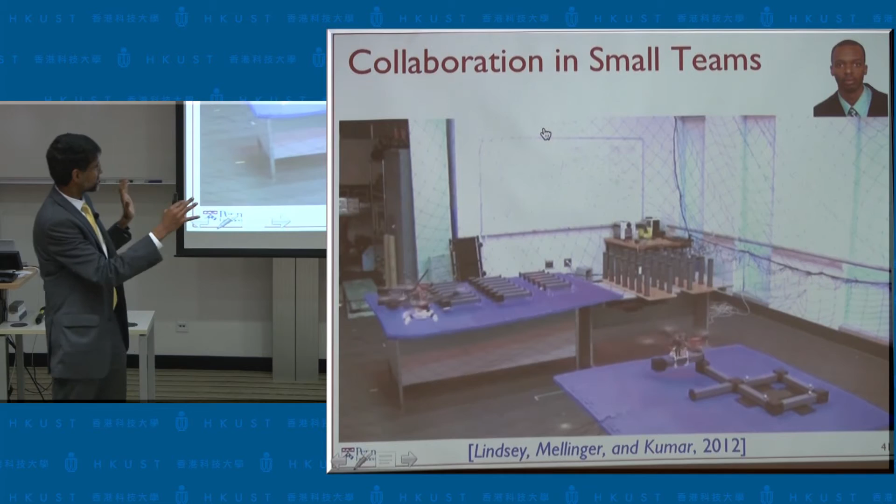Here the assembly task is trivialized in the sense that all the building blocks are truss-like modules with magnetic fasteners, so the assembly process itself is pretty trivial—you bring it into position and it's going to snap fit. But the key challenge is to essentially have the robots figure out who's going to pick up what part and assemble it where. They're all doing it from a very simple blueprint of what the structure needs to look like, not unlike a 5-year-old opening up a Lego booklet and saying, this is what needs to be built, and I'm going to pick these blocks and put them together. That kind of intelligence is built into the system, and the robots figure out how to coordinate.

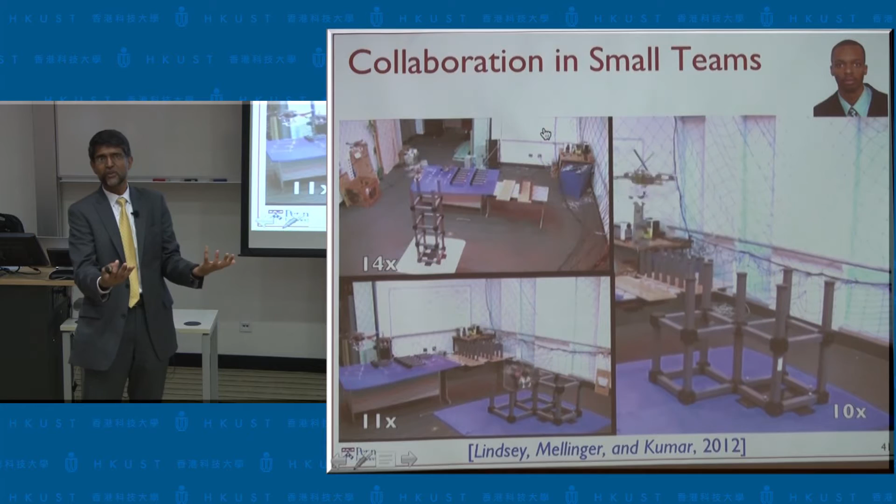In order to build this task, build these truss-like structures, here you see 3 different truss-like structures, each sped up a little bit. There's a lot of coordination involved—robots have to figure out how to plan paths, how to make sure these paths don't intersect each other, and also make sure they get the assembly done the right way.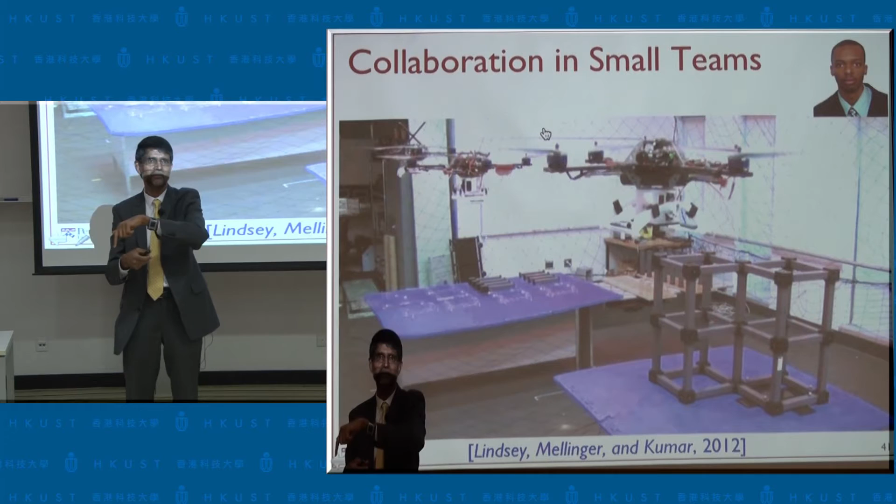So the problems here, if you think about scaling up to large teams, you have 2 types of problems. First, when you have lots of robots in the same space, you have to worry about collisions—the problem of resolving conflicts scales quadratically with the number of robots. The second problem is this question of who goes where and does what—this is a combinatorial problem, so this grows as n factorial. Both these problems are kind of swept under the rug when n is small. There's only 3 here. So we want to solve these problems for large numbers.

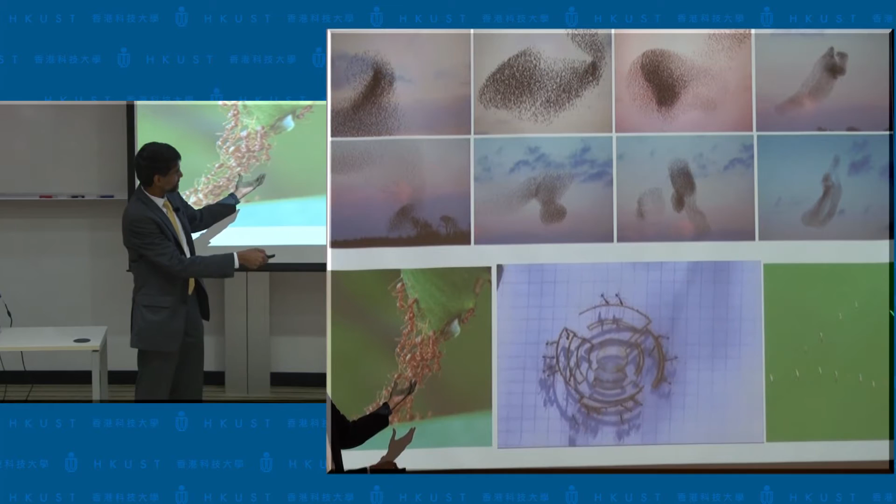So how do ants do this? Or migratory birds? There's a recent study in Nature that shows that birds save about 20-25% energy just by synchronizing the wing beats—not necessarily maintaining the shape, but making sure the wing beats are actually synchronized in order to minimize the amount of fuel consumed.

So these are good problems to study to figure out how we can get robots to behave the way we want them to behave. In all of these systems, you can come up with three organizing principles. First is this notion of acting independently. There's no way you're going to have in any of these examples one of the ants or birds essentially say, this is how everybody's going to do things. So this just does not work.

The second idea is this notion that each of these individuals acts based only on local information. So there's no way that ants over here know what's happening to the swarm at the other end. Or even in this case, these ants are surprisingly unaware of ants on the other side of the object.

And then lastly, there's this notion of anonymity. Ants are pretty much agnostic to who their neighbors are. Birds are agnostic to who their neighbors are. If maybe a group of 3 or 4 of us had to pick up this table and take it out of the room, we wouldn't care too much about who is joining the team. We'd be fairly agnostic to who the neighbors are in that task too.

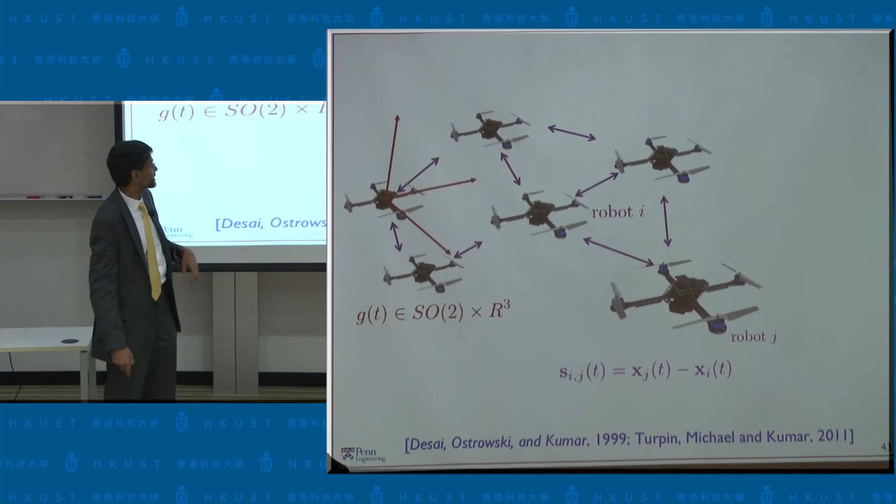There are as many shape variables as there are neighbors on the graph, or pairs of neighbors on the graph. So we have all these shape variables that need to be regulated, and we have one or more leaders that are figuring out how to move. Again, this is in that flat space—this is the yaw variable, and this is the xyz variable.

We can form these leader-follower networks where there's one leader. This is, by the way, a guy by the name David Pogue who writes for the New York Times. He actually writes a tech blog—it's quite an interesting blog if you care to read it.

So he wanted to see if he could actually command the swarm. Now, it's not really a swarm—it's only 4 robots, but our lab is small, so we can't do very big groups. But you can see that just by controlling 1 robot, he's able to control this entire team.

The whole idea is that the complexity in the task is reduced significantly when all you have to do is worry about this one guy being controlled. By the way, this is the work of Katie Powers, a graduate student. So David is essentially playing the role of a coordinator without explicitly commanding all these other robots—they're essentially following their neighbors and making sure these shape variables are maintained.

Then there's this notion of anonymity, work of Matt Turpin. If you make robots anonymous, surprisingly, the n factorial problem actually gets simplified, and it becomes order n cubed. So this is an algorithmic trick.

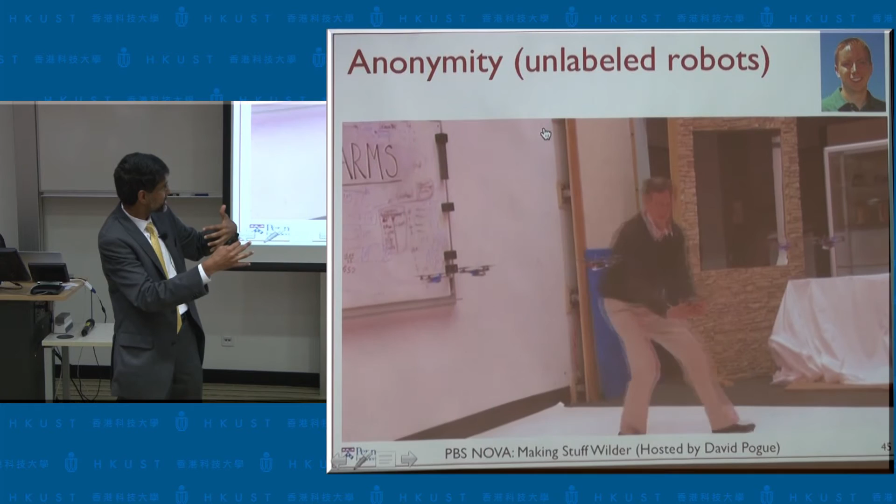The idea here is that you can see David deploying these robots, and the robots essentially react to their neighbors. They've been asked to form a shape, so when new robots get introduced into the formation, they automatically spread out to form the shape. When robots go away, they again squeeze to form the same shape.

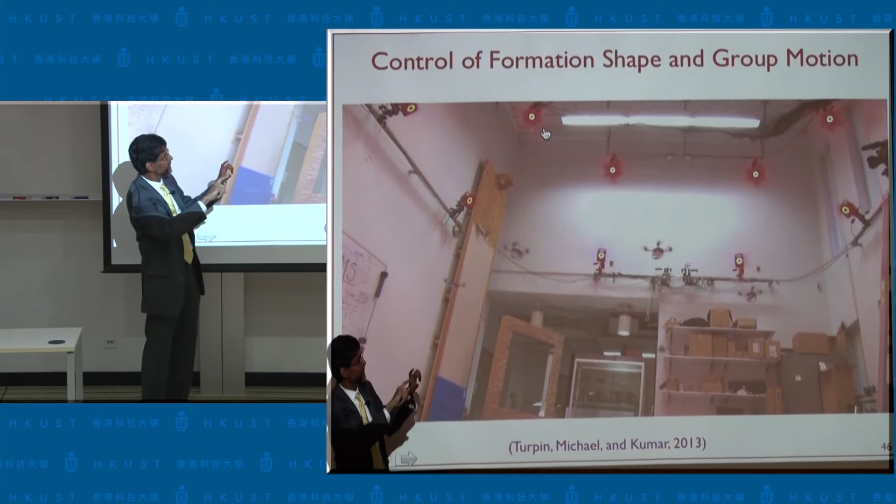These kinds of behaviors happen naturally, and once you have these basic building blocks, you can create shapes and have the shapes move as a function of time. You'll see the formation shape change. They start off in a rectangle, flatten out into a circle, then you'll see them straighten out into a straight line, and then go back into an ellipse.

So the commands being issued are essentially the mathematical description of the shape and its 3-dimensional position. These high-level commands are independent of how many robots are in the formation and who the identities are. The computations are essentially constant, they don't scale with the number of robots. That's pretty important to make all of this work.

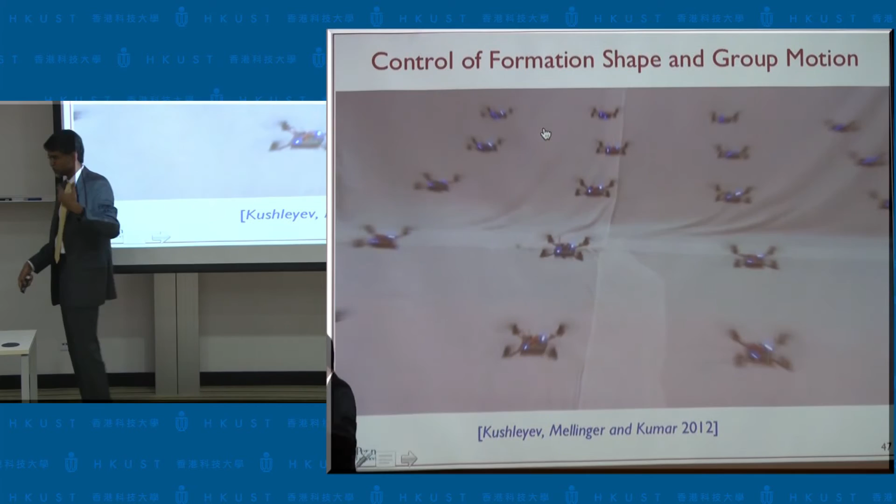This is the largest team we've done in our lab, 20 robots. Again, this is done with the motion capture system, so the robots actually know exactly where they are, and they also know where their neighbors are fairly precisely.

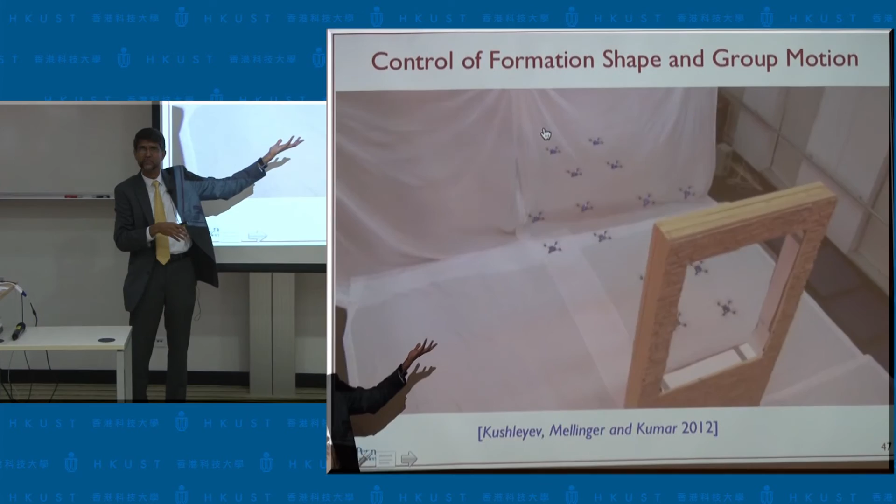You'll see the formations changing shape, changing position and orientation, going from 3D to 2D, reacting to obstacles in the environment, and then changing shape to squeeze through the obstacles. Finally, you see this figure 8 pattern, shown from the top view, and you can see fairly precise coordination, with robots reacting just to their neighbors.

So why are we doing all of this? Besides making cool videos, why worry about swarms? Let me just show you an experiment that we did in Sendai that motivates some of this.

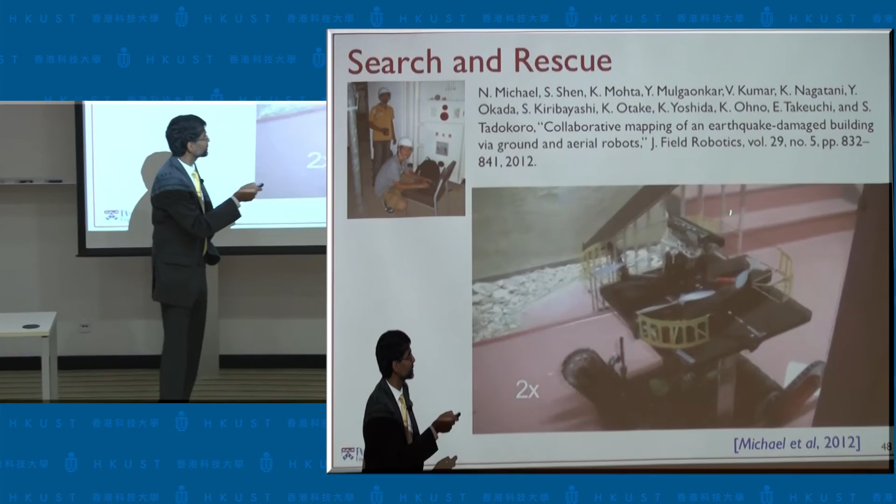This was done with two robots. You can see our big robot with the Kinect and the laser, and below it is one of the robots built by Tohoku University, like an iRobot PackBot, if you've seen that. This was used in the Fukushima reactor buildings. You'll see our robot sitting on top of this, held by a landing pad, which actually retracts and closes.

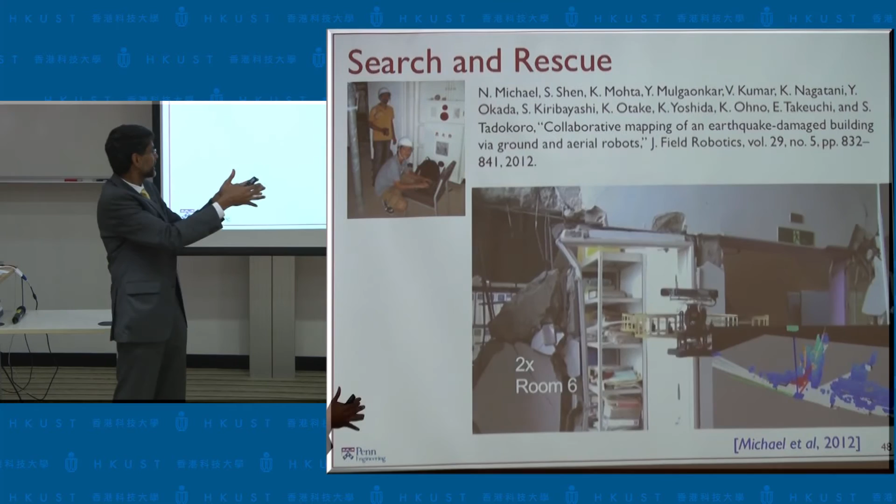When the team is confronted with an obstacle, it retracts and lets our robot take off. You can see our robot building a map, going into this room, going on the other side of this bookshelf, things a human being couldn't do in a collapsed building.

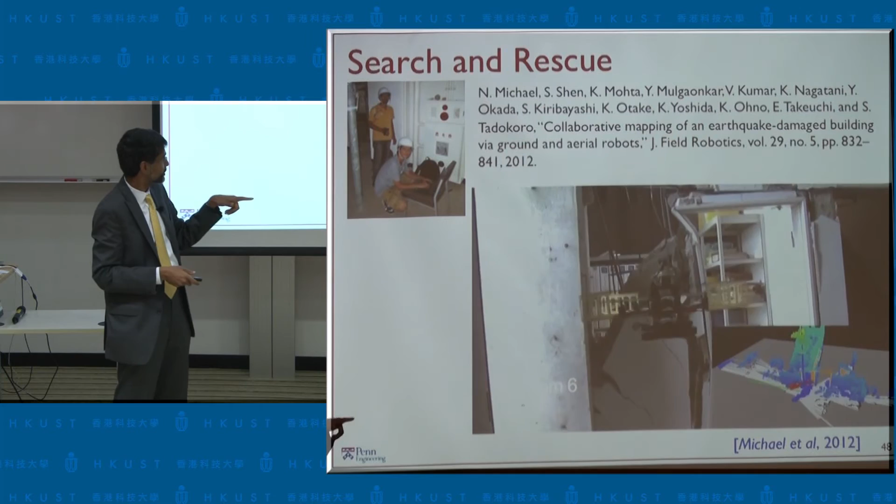You'll see it go into a neighboring room now, which has all these pipes that were erected to protect against earthquake collapses after the first one. It's able to navigate that. Again, the ground robot would have gotten stuck, but the aerial robot is able to navigate.

The key thing is that the information gathered by the ground robot and the aerial robot could be integrated, and we could create maps like this. This is a map of the 7th, 8th, and 9th floor of the electrical engineering building at Tohoku University. This experiment took us about 2.5 hours to complete.

So you can imagine if you had an earthquake and you want to go in and look for victims, you don't have 2.5 hours. You don't have the luxury of that much time, right? So you want to do it really quickly, in 2.5 minutes, if not 2.5 seconds.

That's the kind of capability you can build in if you had, let's say, a fleet of 100 flying robots walk in with the same kind of hardware. But now imagine that they're smaller by a factor of 5. So 10 minutes is plenty of time. We should be able to do this, and we should be able to create these kinds of maps.

That's where our research is taking us. We'd like to be able to coordinate these robots to collect this kind of information, but do it several orders of magnitude faster.

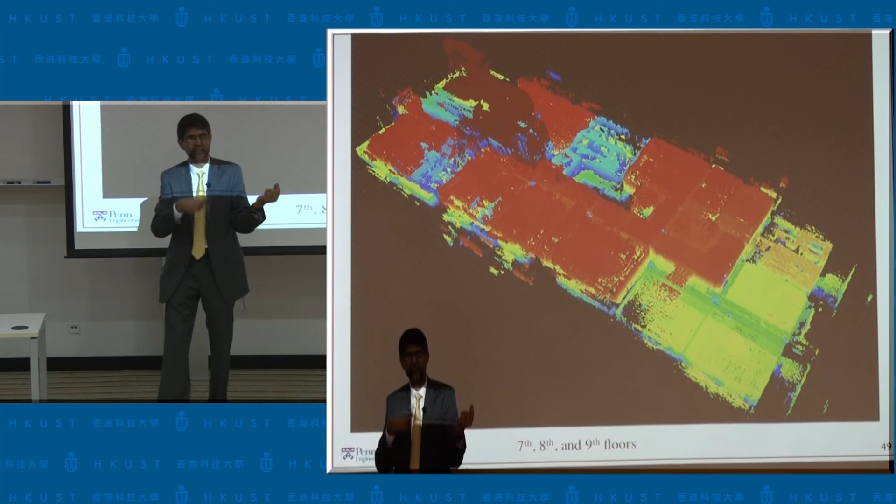So let me conclude on a light note. I want to show you a video, it's a fun video.

This was created by my former students at KMel Robotics. It has some audio to it.